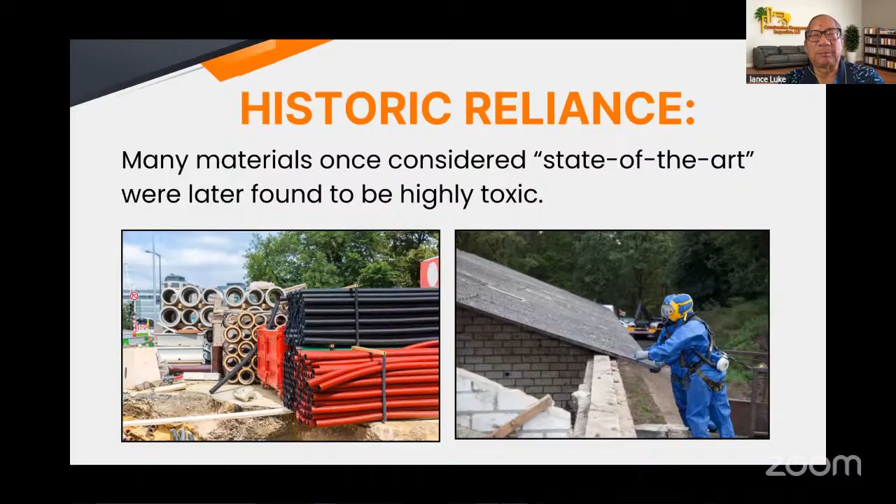So historical data - there's hundreds of thousands of buildings today, and homes. We're talking about any kind of building. It could be a home, single family home, duplex, multifamily, apartment building, condominium building, office building, a golf course, shopping center, a church, a school, any number of buildings, industrial. They all may fall into this one pot where older buildings may have some hazardous materials.

So older buildings, schools, homes, office buildings, may contain asbestos, lead paint, and other risks. Now, the cutoff date for asbestos and lead paint, according to EPA, is 1977, 1978. That's when the construction industry stopped using these materials because it was determined to be hazardous by the Environmental Protection Agency. So basically that's the cutoff date.

So if you have any property, managed property, or owned property that was built in the 40s, 50s, 60s, and even the 70s, there's a chance that it may contain any number of hazardous materials. And realtors throughout the nation are educated and trained to know this, because when they're representing sellers or buyers, there's a disclosure - specifically a lead paint disclosure is required by law. It's mandatory that they let the buyer know either they're aware of lead paint or they don't know if there's lead paint or not. But there could be, based on the age of the building or property.

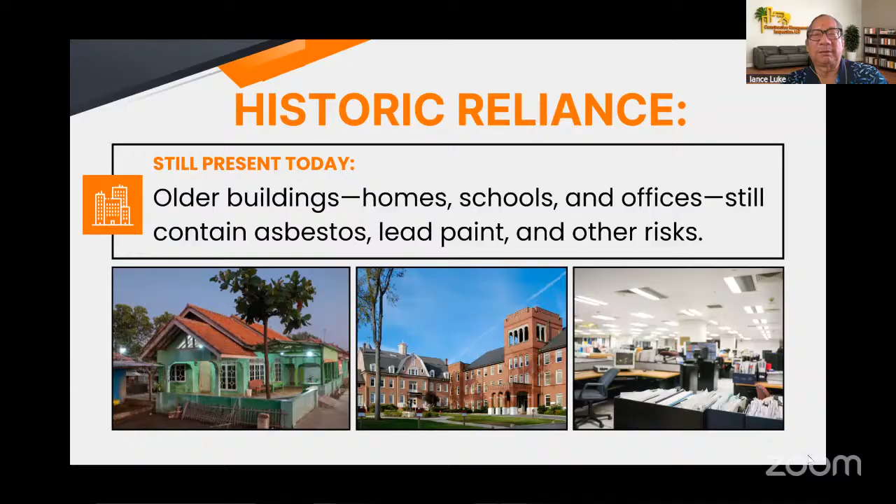Now, you might say, well, what's the problem? If the house is old and let's say it has asbestos and lead paint, do I have to move out? Do I have to knock down the house and build a new house? No, you don't. But you just have to be aware of these things. If you're going to do any construction work that involves damaging building material - let's say you have lead paint on your house siding and you're going to add an addition and you've got to knock down a wall - well, you've got to be careful because now you're dealing with lead paint.

So, drywall could have asbestos in the drywall, in the tape joint or the mud that they use for the drywall finish.

Okay, so you don't want to cut the walls, and now the asbestos is released in the air. Similarly, if you have this popcorn ceiling, you may say, well, I don't like the look of that ceiling. It's collecting dust and it's somehow looking yellow, and I just don't like the look of it. So let's scrape it off and paint it, or texture it so it doesn't have that cottage cheese look, right?

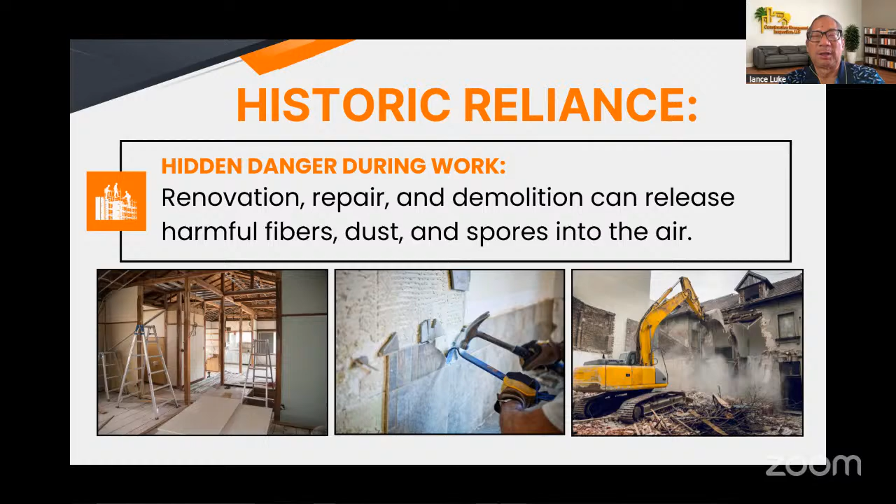You have to test first, and if there is hazardous materials, you have to abate it. You have to hire a licensed abatement contractor, and they have to come in and do their work before you can basically demolish, or you just hire the hazmat contractor to demolish, and they're doing the abatement at the same time.

And you might ask, well, I've heard about hazardous materials, but what is the big problem? Well, it's unseen risk, because if you look around the house, it's not like you can easily see the asbestos or see the lead paint. So it's not readily and immediately visible. You can't see it. That's why it's kind of scary.

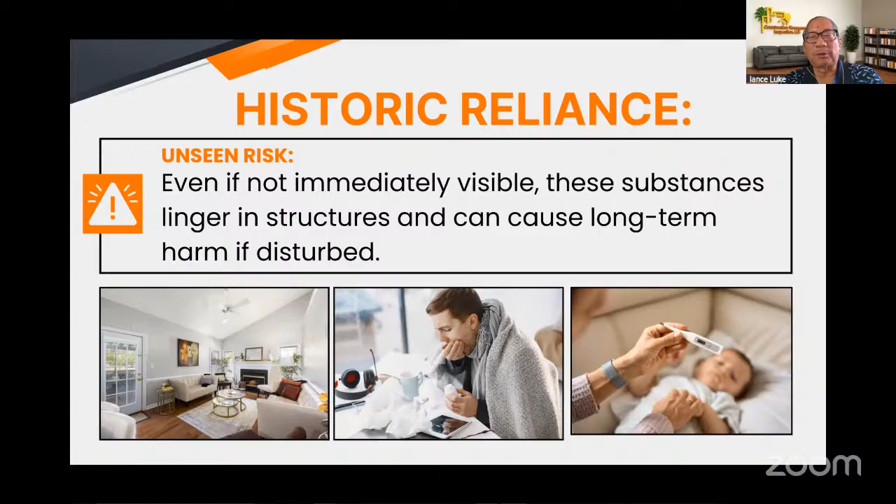But these hazardous substances linger in structures for years, and they can cause long-term harm if disturbed. Now, if it's not disturbed, it's not that harmful. But it's the disturbing part where you cut walls open and you start scraping things, then it becomes more problematic.

So, for instance, asbestos is commonly found in insulation, in ceiling tiles, floor tiles, drywall, mud. There's an old building material siding called transite that had asbestos in it too. Also, in the old days, when you have your plumbing pipes and you want to keep the pipes insulated, there's this wrap. It looks white in color, and it looks sort of like hospital material, gauze or something like that. And they wrap that material around water heater piping and things like that. And that's been found to have asbestos material in it too.

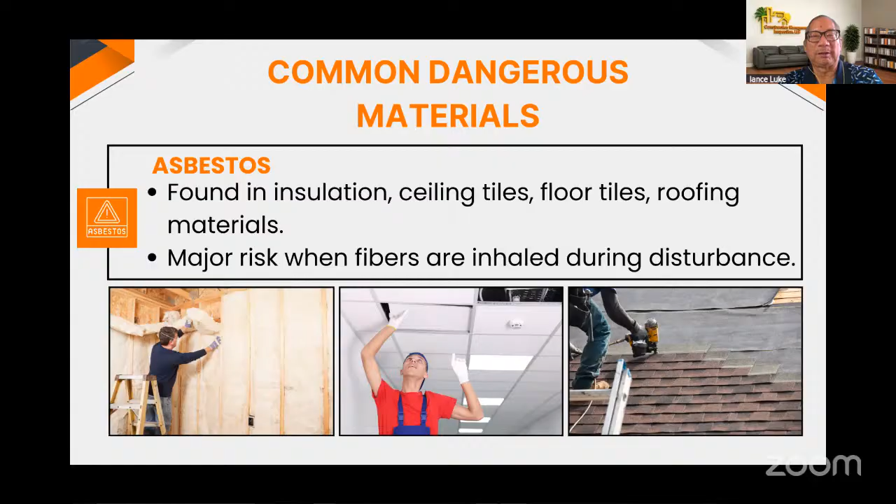So the major risk is when the fibers are flying in the air and they're inhaled during the disturbance. The problem is these asbestos fibers, if you look under a microscope, it looks like shards of glass, real small. You can't see it with the naked eye, but what happens is it doesn't dissolve. So when a human starts breathing that stuff, it goes in their body and it doesn't dissolve. It's sort of like lead in lead paint. So that's the scary part.

So let's talk about lead. Common in old paints, water pipes, solder that they use in soldering pipes. And it's especially dangerous with children. It causes learning and developmental issues, and this has been proven. There's many medical studies about having tested children that have high concentration of lead paint, and they have learning and developmental disabilities and all that. So those studies are available, and it's been around for many years. A good reference is if you want to search Environmental Protection Agency and you just put in asbestos or lead, and there's thousands of pages that come up.

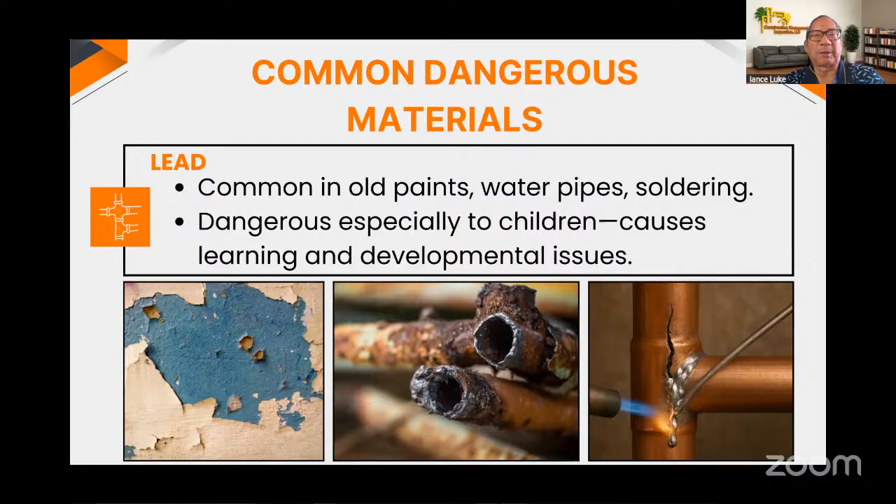Now let's talk about mold, the four-letter word. It grows in damp, poorly ventilated spaces, and it can trigger asthma, allergies, and respiratory infections. I've been involved as an expert on mold-related claims.

Like maybe 10 or 20 years ago, people didn't think mold was that bad. They'd say, I forgot I had a loaf of bread sitting around, and when I remembered, I looked at it and there was all this mold growing in the bread. Well, I don't think that's dangerous. Well, that's a different kind of mold. It's not the same mold as the mold that would grow on drywall.

So how do you know what type it is? Well, we don't unless we test it. I can't even look at it and say what type of mold it is. I can look at it and say it is mold, but how do we know if it's dangerous or not? But surely when you go to the home and garden store to buy drywall, it doesn't come with mold in it, right? Well, hopefully it doesn't. If it does, take it back and get a refund, okay?

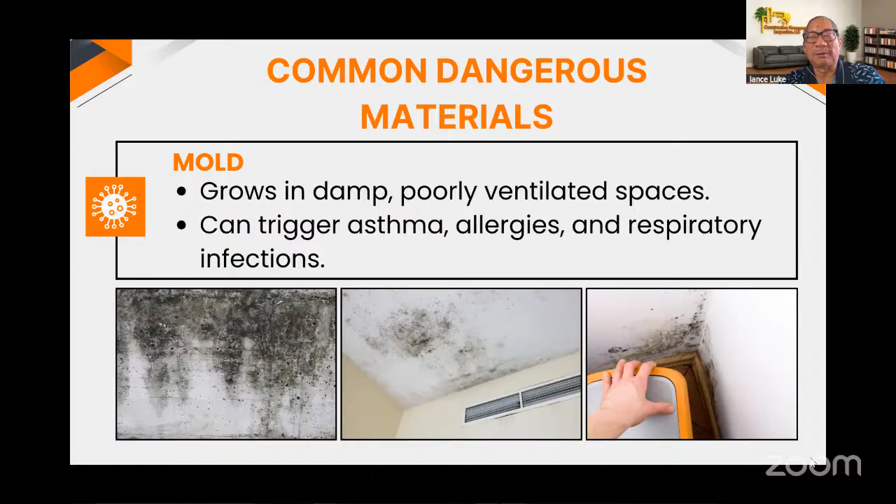Now, here's something that is fairly new, although it's been around for years. When I say it's fairly new, I mean it's fairly new in the discovery that it's a hazard. And it's called silica.

What is silica? It's created when cutting, grinding, or drilling concrete, stone, brick, or man-made tile or countertops. You have these quartz countertops, and it could be man-made, or if you have granite or marble, just cutting it exposes dust, and it's actually fine particles of silica. Even in concrete. So fine dust particles scar lung tissue, leading to silicosis. It's sort of like breathing lead paint or asbestos.

Now what causes this? Well, you could have just concrete, and if you're grinding, sanding, drilling, or pounding it in any way, and it releases dust, there's silica in that fine dust, so you don't want to breathe that. In the past, people working with concrete, whatever kind of work they were doing, no one was wearing masks because no one thought it was a big problem. But now it is. There's reports of people getting sick, tested by the medical field, and that's how they came up with it—all of a sudden silica is a bad thing now.

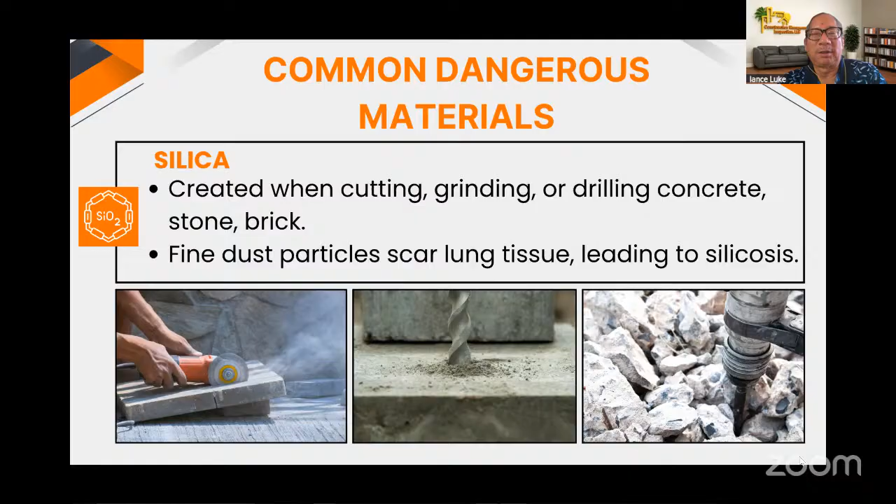So it's affecting the whole construction industry. Silicosis is a deadly, incurable lung disease. It's been confirmed early on—there's a worker who all he did was fabricate countertops, and that was the first case. The guy was getting sick, and they asked, well, what do you do? I cut countertop material all day and install it. Then they determined he was breathing all this dust, and that's how he got sick. After that, more workers were reported. So it's now a huge health concern.

Quartz countertops look really nice and aren't that expensive compared to marble or granite, but it's very hazardous, so the workers have to be prepared. In the old days, they used to bring the slabs and cut everything on site. Now a lot of contractors who install this material want to cut it in their warehouse where it's easier for protection, then truck it to the job site, making fewer cuts there. It's actually safer because cutting the material in their warehouse is a more confined environment.

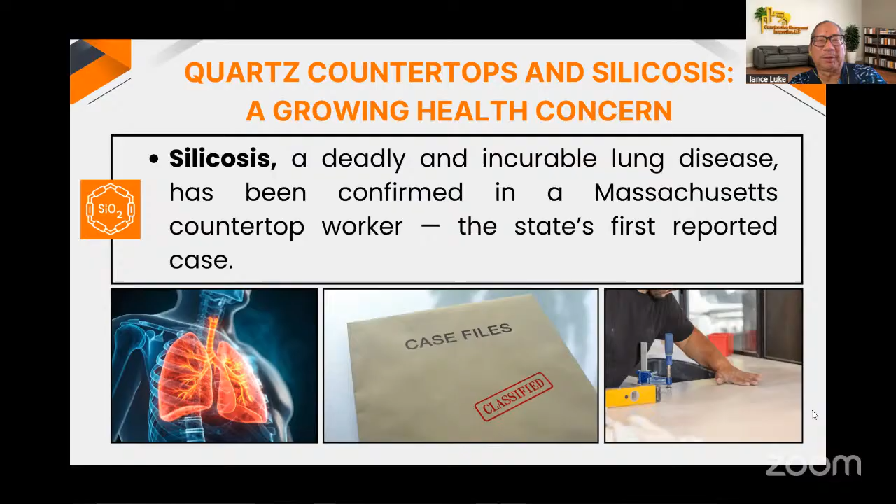Okay, more about this quartz countertop. The disease is caused by inhaling the crystalline silica dust released when cutting or grinding the engineered quartz. They call it quartzite, or there are different names for the material. What it actually is is quartz material mixed together with other materials and formed to look like a slab you got from a mountain, but it's not like virgin granite or marble countertops where they got these big slabs of stone. It's not the same thing—it's man-made to look like marble, granite, and other kinds of stone, but we're talking mainly quartz.

There's a name, Cambria. I just remembered it, and it's the same thing. It's all engineered, and when you cut it, it releases dust that's hazardous. So don't breathe that stuff.

Let me show you. If you can see the images, this guy is sanding, and then he's cutting. And if you look, he's wearing safety gloves, which is required, but he doesn't have a mask. Maybe he thinks he's too handsome, he doesn't need to wear the required mask. But this is actually an OSHA violation, by the way.

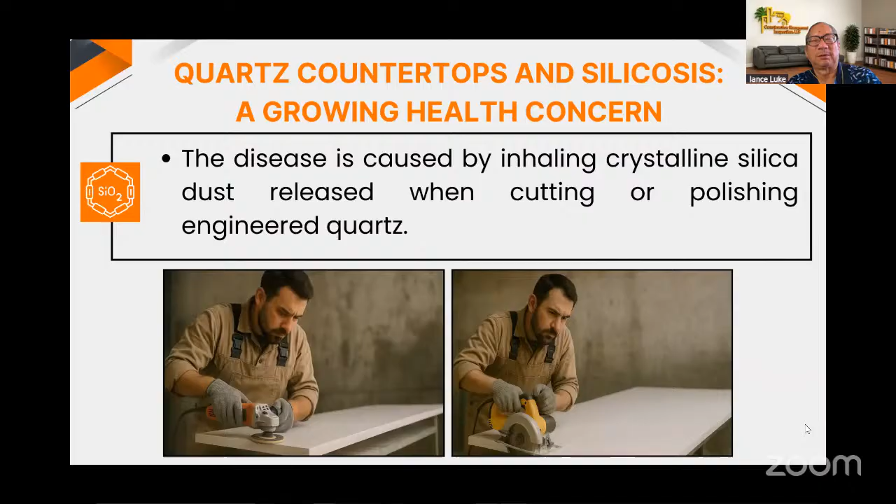So it's a big deal. Quartz countertops and silicosis is a major growing health concern.

And I'm not an MD. Martin's not either, well, Martin plays the MD on TV, but in real life he's really not. We're not professing to be well versed in medical terminology or the medical field. We're not doctors, we're not nurses, we're not really much in the medical field, although we do a lot of research on health and safety. But we're giving this information to you coming from a building expert standpoint because we're concerned. We're not only concerned about maintaining buildings, we're concerned about people working in buildings.

And as I mentioned, all types, your own house, or it could be a 40-story condo project that's a union job. Everybody still is required to follow the same standard of practice.

Quartz countertop imports to the U.S. have risen 800% because people like the look and it's cheaper than natural stone. But what happens is this increases exposure risk for the fabrication workers. Anybody that's touching a material, grinding it, cutting it, installing it, they're exposed. So you got to be very careful.

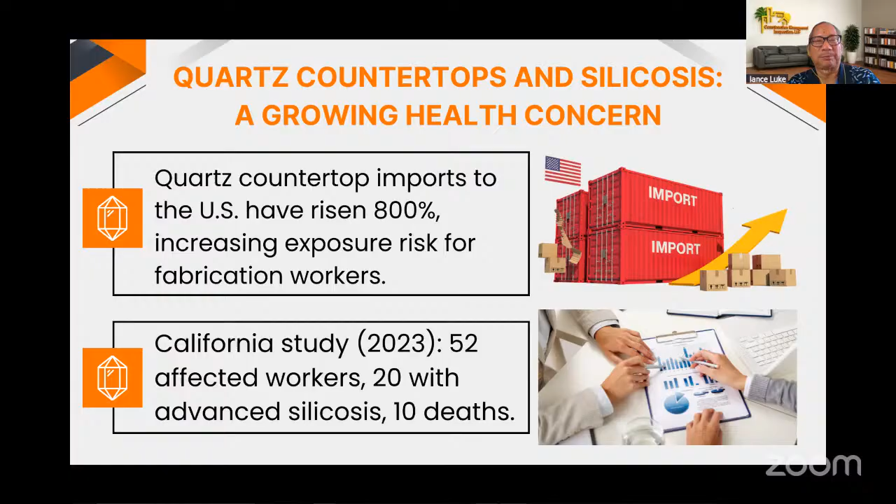All right, regulatory response, OSHA limits. Who governs safety? Construction safety is OSHA, Occupational Safety and Health Administration. Now, they give certain guidelines about the number of exposure over an 8-hour period, all this stuff, but I don't even follow that. It doesn't matter what the exposure limit is over what time period. You best wear your full PPE and be aware.

So many fabrication shops remain out of compliance. How do I know? We got that information from OSHA. California, which is a pretty progressive state, and we're in Hawaii, and usually California is the first state that has adoption of something, and then Hawaii usually follows. California adopted permanent silica safety rules in 2024. This silica issue has been around for 50 years, but only 2 years ago California adopted the silica safety rules. So we're actually way behind the time on safety of this one particular issue. Hopefully every state will adopt similar rules to protect the workers.

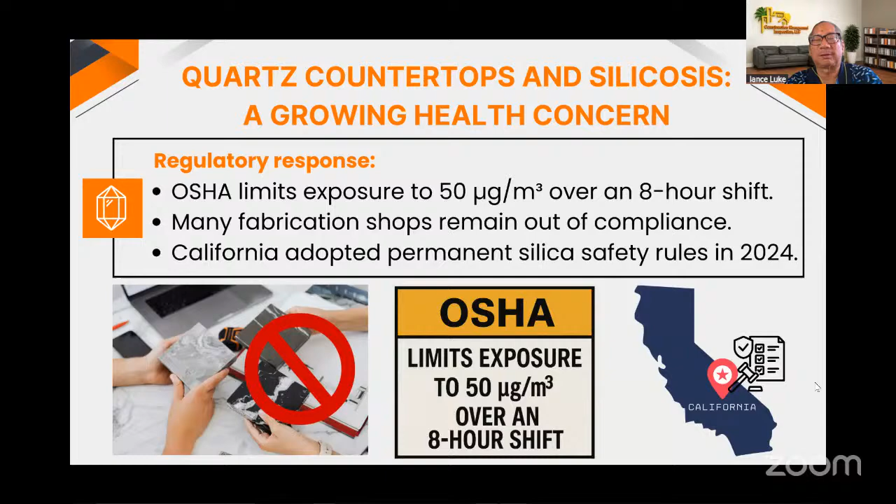So what's the deal here? Well, health officials urge stricter regulation, better ventilation, protective equipment, and medical monitoring for workers. Now, if you're living in the house or the condo while they're doing this work, you're subject to the same guidelines. So are you going to wear protective equipment? What if there's no ventilation?

So if you drive around town and you see contractors working on spalling repair, concrete, and I'm not talking about the quartz now, I'm talking about like a concrete parking deck or a wall or a column or anything, and you see dust. They're drilling concrete, grinding it, cutting it, and you see all this dust. That's hazardous too, that dust. So don't breathe that stuff.

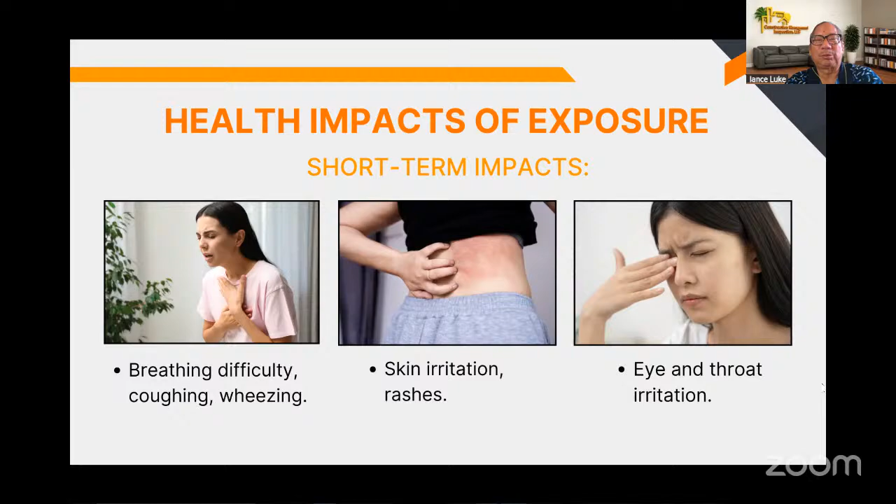Health impacts of exposure. There are short-term impacts: breathing difficulty, coughing, wheezing, skin irritation, rashes, eye and throat irritation. All of these are warning signs of hazardous materials, and it could be mold too, or it could be dust caused by grinding of the quartz.

Long-term impacts: cancer, lung, mesothelioma from asbestos, blood cancers, chronic respiratory illness, silicosis, COPD, neurological disorders, brain damage from lead exposure. So all the things I mentioned could fall into this category, be it asbestos, mold, lead paint, or breathing the dust from building materials such as concrete or quartz.

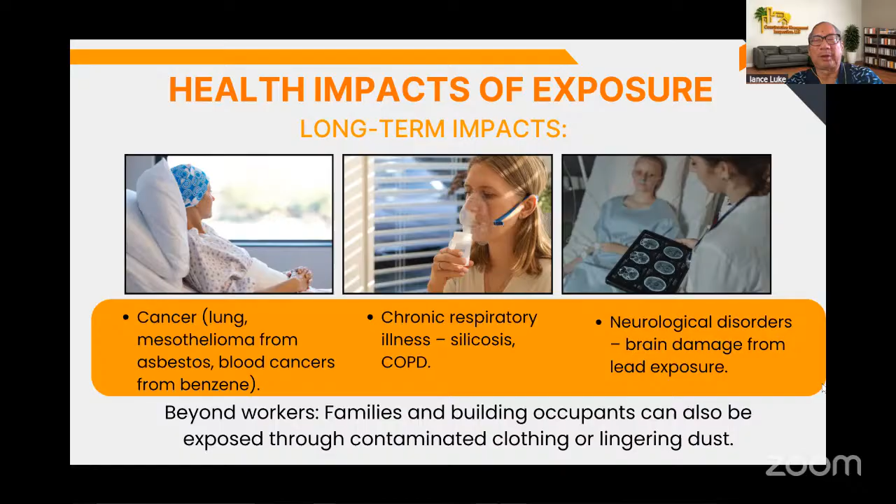Now, beyond workers, family and building occupants can also be exposed through contaminated clothing or lingering dust. So that's something to consider.

And there's a couple differences in lead. There's what's called lead-based paint, and there's another - they're all lead, but there's different degrees of lead. So you have to have it tested and measured. There's lead-based paint, and there's what's called lead-containing paint, and there's different degrees of safety.

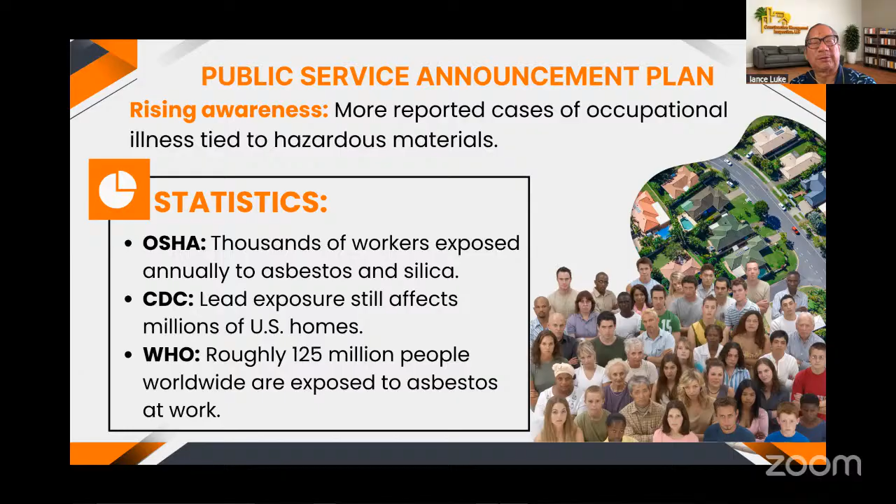And there's the WHO, World Health Organization. Roughly 125 million people worldwide are exposed to asbestos at work, and that's a lot of people. This is coming from an international organization. So as you can see, the problem is not just a small problem - it's major, it's huge.

Here's some case examples: renovation crews unknowingly exposed to hazardous materials during school upgrades. The renovation crew didn't know there was asbestos or lead paint, and they were doing the work and got exposed, trying to fix a school.

Homeowners inhaling mold spores after water damage repairs. No one knew - you have a leak, your roof leaks, you have a plumbing leak. It damages the drywall. You can't see the mold, but it's inside the wall, and the spores are being released, and you're over there breathing it.

And there's several cases I worked on where people were having health effects: headache, dizziness, sore throat. They go to the doctor and get a clean bill of health. So you wonder, wow, what's going on?

So there was one case in Florida where I worked as a consultant, and they kept getting sick - the mother was getting sick, then the child was getting sick. So sick he had to take weeks off school and fell behind in his homework. They took him to the doctor, went to the hospital, ran all these tests - CAT scan, any kind of scan, EKG, blood test, whatever.

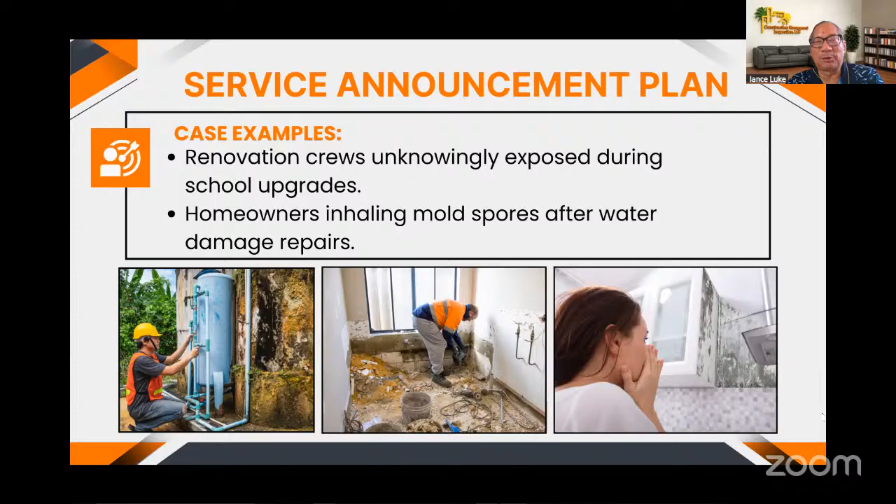And then she mentioned my name, and she said, 'Oh, is that Luke guy a doctor?' And he said, 'He's not a medical doctor, he's a building guy.' And I was a big hero. What happened was, it was a pretty fairly new home, and through my help, we got the developer builder to actually buy the house back. I guess there was a threat of a lawsuit or something. But anyway, that was one of my good stories where I help people.

Okay, best practices for safety. Number one, PPE, personal protective equipment. Make sure you have it and make sure you wear it. Air monitoring and containment zones - you want to monitor what's going on.

If you're working with asbestos, mold, or lead, construction's going on in an enclosed area, you want to monitor for safety. You don't have to go back in and breathe the leftover mold that was still in the air. Number three, safe disposal and cleanup. Number four, after you finish the work, you want to clean yourself up. If you have clothes, you don't go walking into your house that's not contaminated and contaminate the house because you have all these clothes that have all the dust and stuff that you're now bringing into your house.

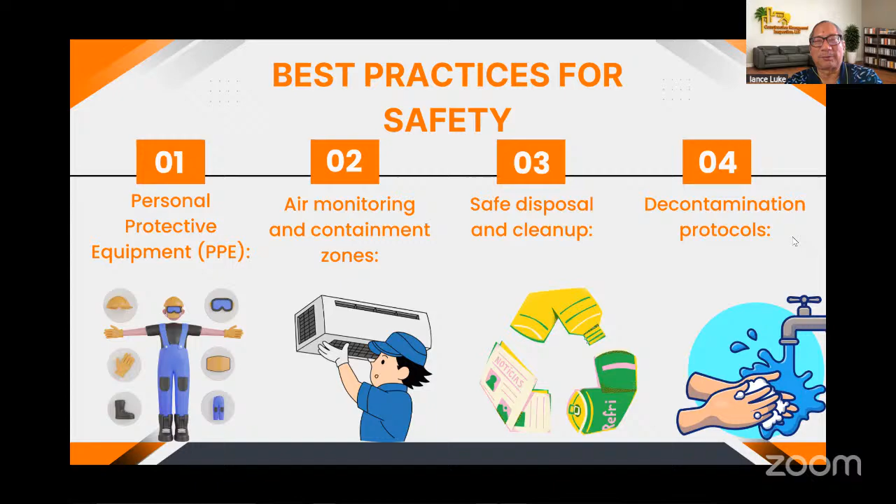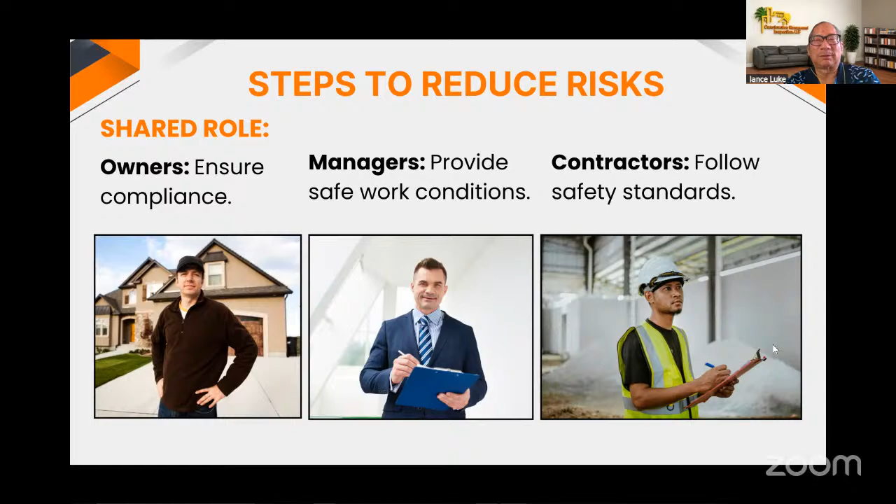Okay, some more steps to reduce risk. Shared role - owners ensure compliance. If you're a homeowner, a developer, or a property owner, property manager, don't expect the contractor to be following the rules - although you should, but make sure they do follow the rules. Managers, site managers, resident managers, homeowner association managers provide safe work conditions. And contractors, you got to follow the safety standards.

Okay, all this are key. Key takeaways: ongoing hidden danger. Hazardous materials are still present in many older buildings, creating risks during repairs or demolition. Here's a photo of an older building - I wouldn't even go in there. It looks too scary, right, without even knowing if it's safe or not.